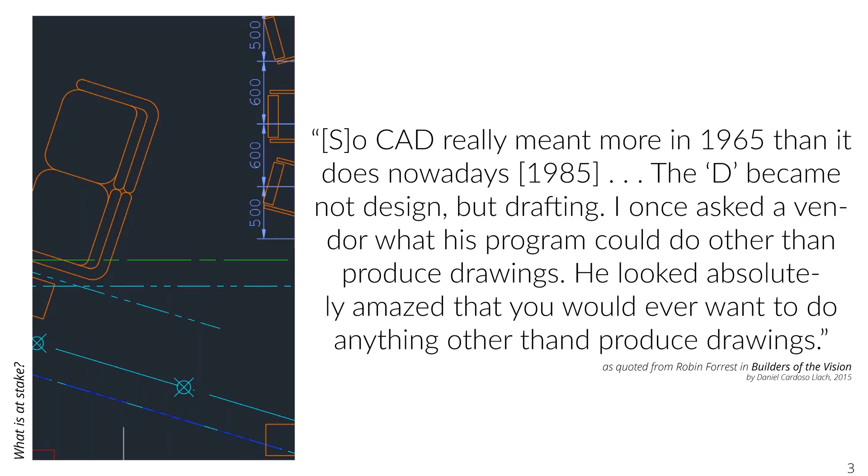often go unnoticed. Within the scope of this research, I point to two implementation inherent drawbacks of contemporary computer-aided design and manufacturing tools discussed in computer science, human-computer interaction, and computational design literature. The first one of these is the linear processing of information.

Primarily, CAM tools heavily rely on pre-programming of toolpaths, which intrinsically inhibits users from exploring the design space. This, in turn, results in inflexibility to reflect and iterate on ideas quickly within the fabrication process, and increasingly excludes the human agent from the process altogether.

Since the contemporary software packages are geared towards optimization and automation, the second limitation surfaces in the form of generic solutions offered by these tools. These algorithms often fail to capture nuances in materials and techniques and are overlooked by non-expert users that lack the means to navigate these complex computational systems.

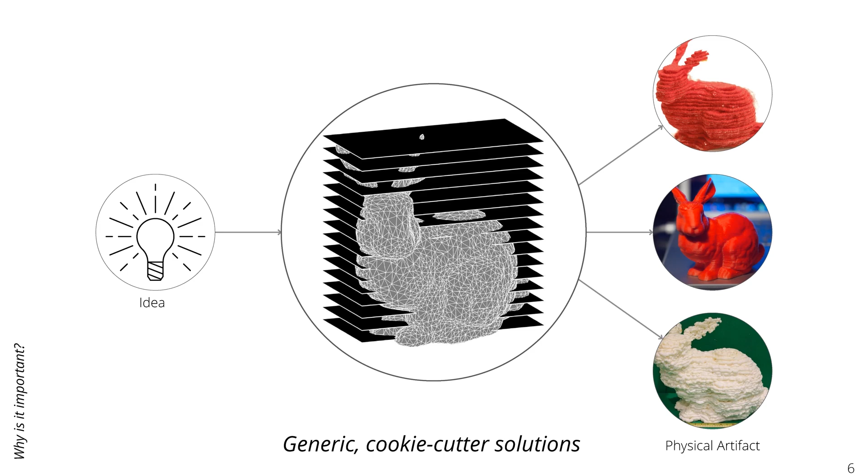Lately, there has been growing interest in probing computer-aided tools to facilitate adaptive and interactive fabrication scenarios in fields like computational design, architecture, robotics, and human-computer interaction. Especially in the HCI community, one of the main areas of interest has been exploring alternative interaction interfaces ranging from augmented reality to capacitive touchscreens for digital fabrication purposes.

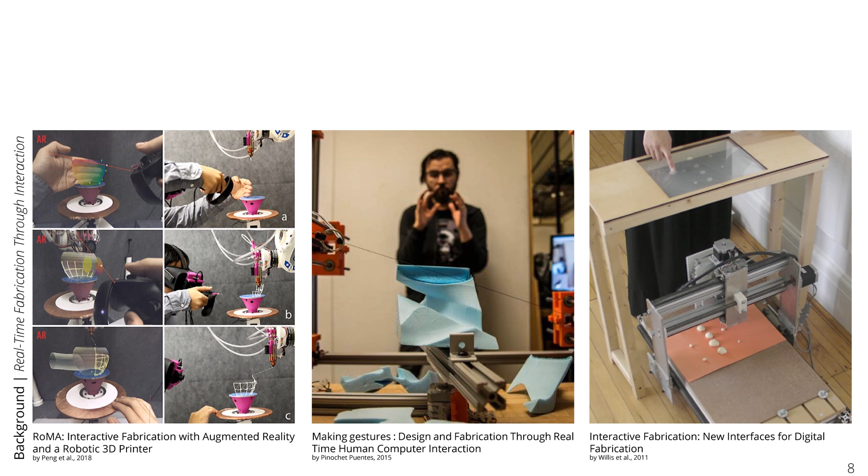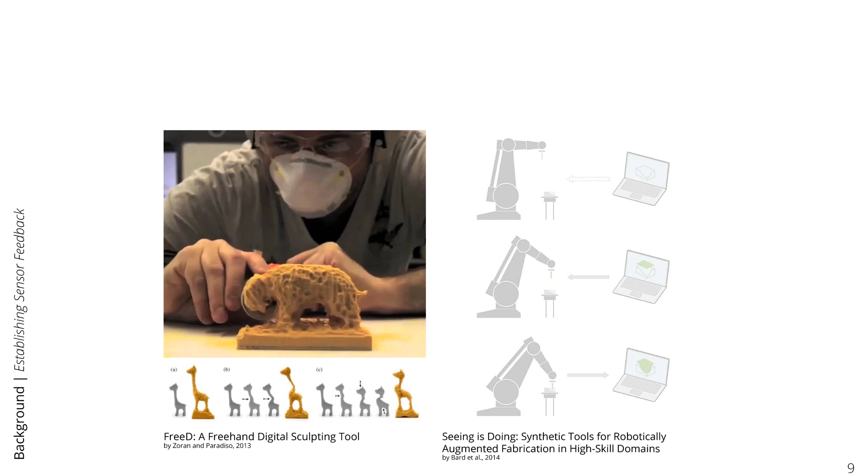In another approach, researchers have been looking into how establishing a sensor feedback loop between digital representation and physical artifact can enrich the fabrication process. Building upon the existing body of work, this research proposes an alternative interactive design fabrication workflow. Throughout this process, human and machine agents take on different roles with varying levels of contribution to the process.

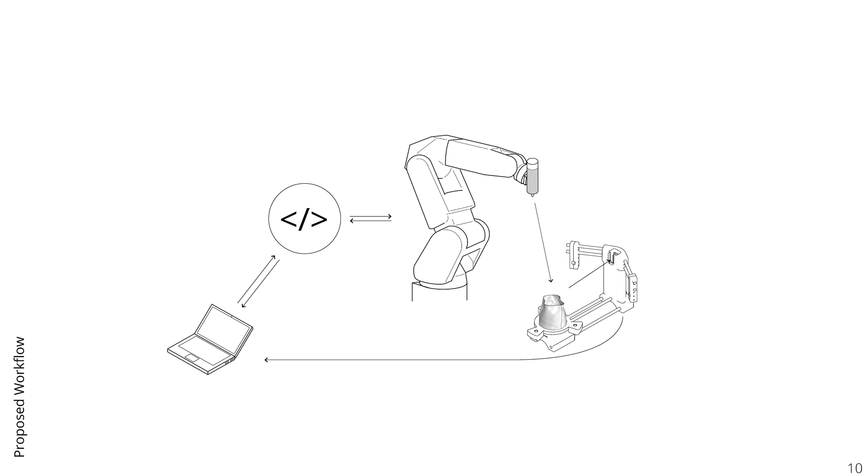By investigating this turn-taking approach, this research aims to explore computer-aided systems not as sole algorithm executors, but instead as flexible facilitators of digital fabrication, capable of incorporating changes and adapting accordingly. This proposed workflow is mainly composed of a mechanical paste extruder, a laser stripe triangulation scanner, a real-time communication protocol, and Grasshopper and Python-based scripts.

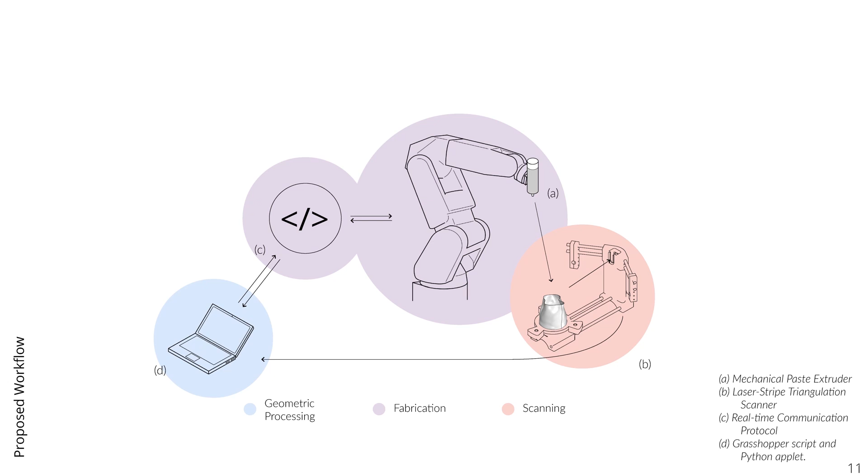Before I share more in-depth information about the technical implementation, I would like to walk you through the workflow. The proposed design fabrication workflow starts with the initial geometric processing stage, where a slicing algorithm generates a series of toolpaths from the input geometry.

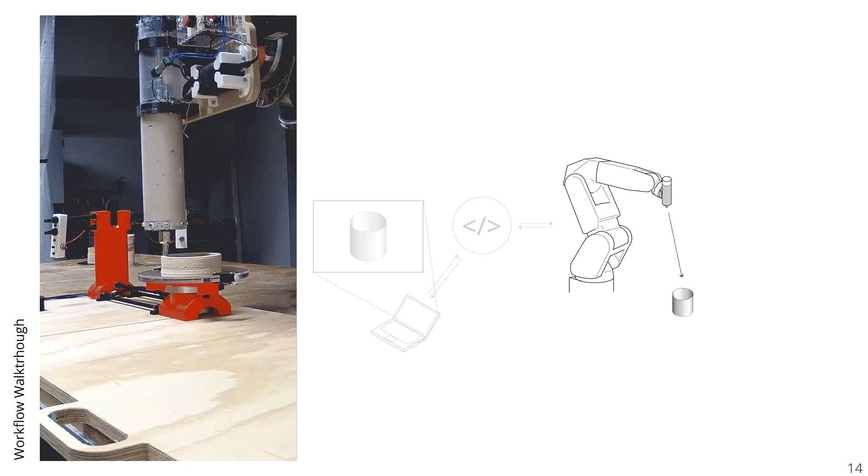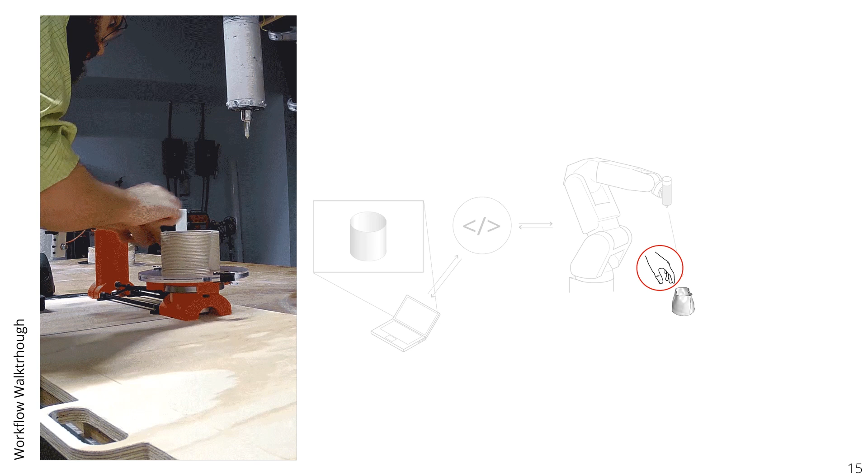Target planes generated by the slicer are then sent to the robotic arm layer by layer using a real-time communication protocol. The fabrication process is carried out until all layers are fabricated, or the user pauses anytime after a sufficient amount of material is deposited for the user to modify. Once the fabrication stage ends, the industrial robotic arm moves away from the fabrication environment for the user to safely manipulate the artifact by hand.

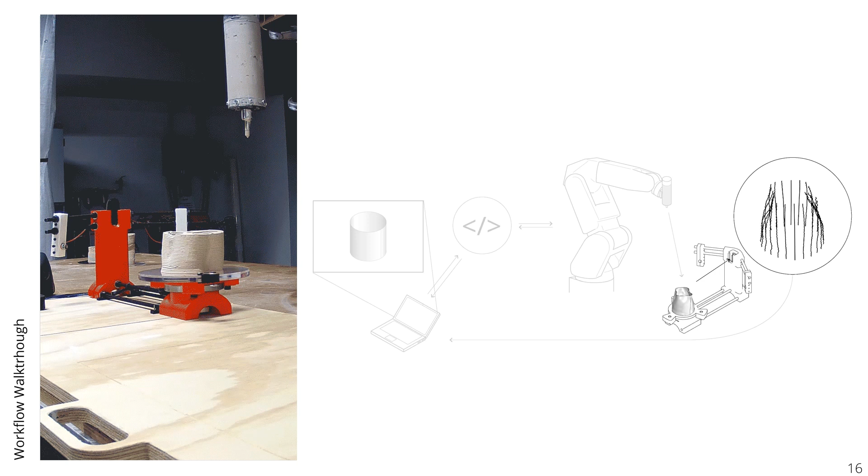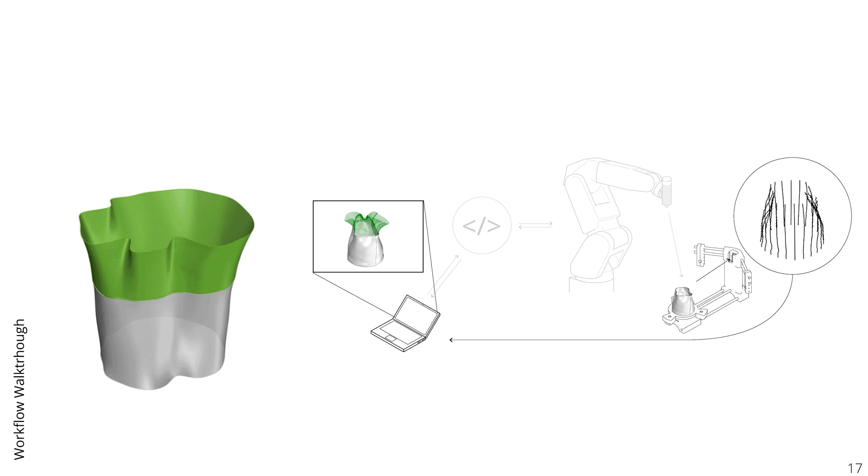Once satisfied with the geometric deformation, the user can initiate scanning of the artifact and subsequent digital reconstruction. Following the digital reconstruction, the geometric extrapolation algorithm generates a design hypothesis using the surface tangency of the reconstructed surface. Using the keypad inputs, the user can tune how compliant the extrapolation is with the surface continuity of the digital reconstruction and generates extrapolated toolpaths.

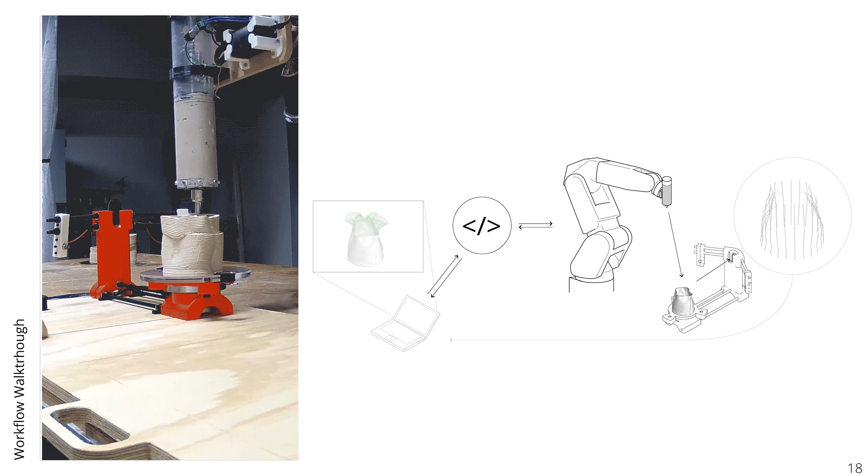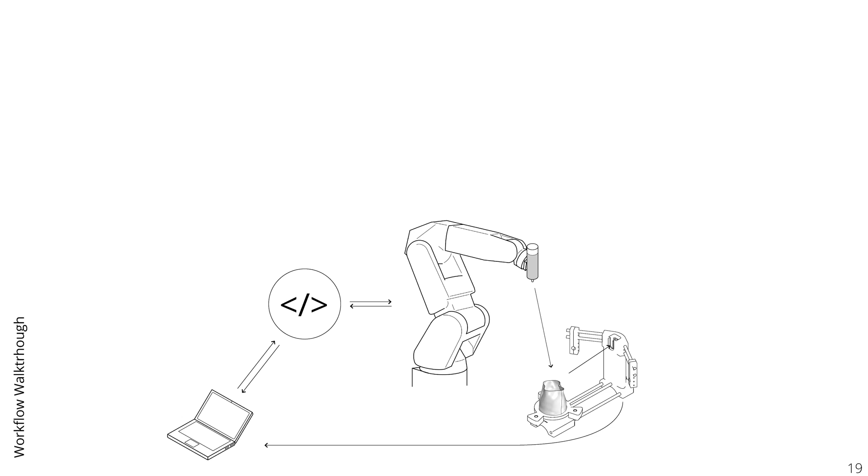Once the user confirms the geometry, the workflow transitions back into a fabrication stage and another cycle of fabrication is initiated. The exemplified cycle can be repeated indefinitely as long as the artifact is within the bounds of the scanner and the artifact is structurally stable.

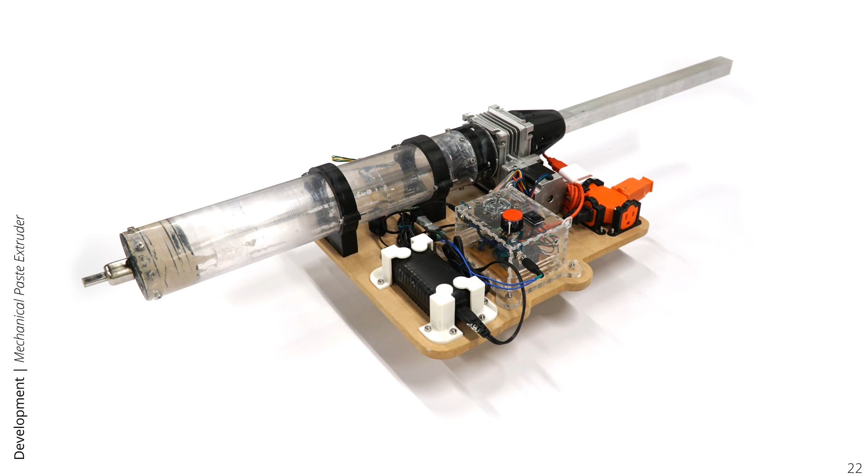This proposed design fabrication workflow heavily relies on the subsystems to work synchronously, and the hardware and software implementations have been significant in pinpointing the limitations and potentials. One of these subsystems is the mechanical paste extruder. Based on an open source hardware project, this paste extruder was modified to accommodate fabrication with an industrial robotic arm. Additionally, a custom circuitry was implemented to allow increased control over material extrusion and to interface with other subsystems.

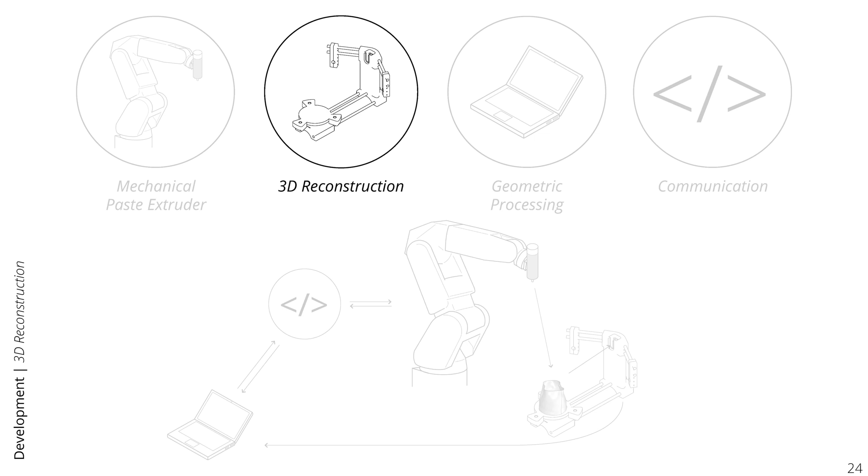The other subsystem that required hardware development was the laser stripe triangulation scanner. Aside from building and tuning the Ciclop 3D scanner kit, significant modifications were made to appropriate the hardware to the proposed workflow. For example, laser light sources were custom fitted with 3D printed mounts to intentionally occlude the light to only shine on the side that is closer to the camera by lowering the light source.

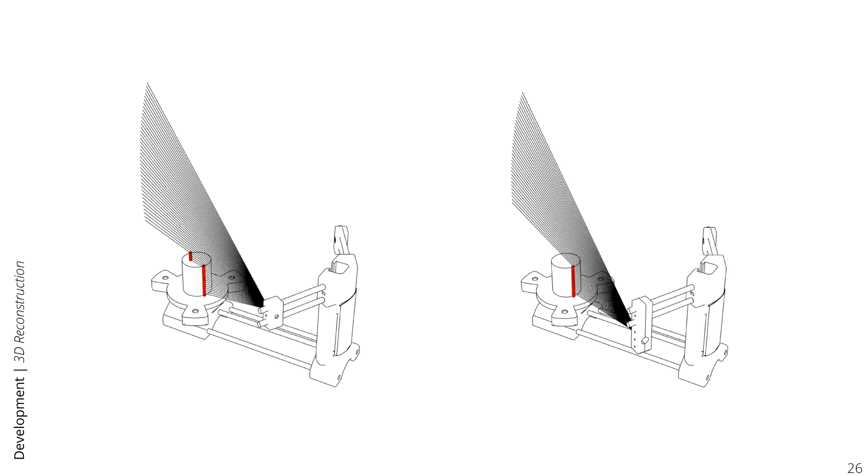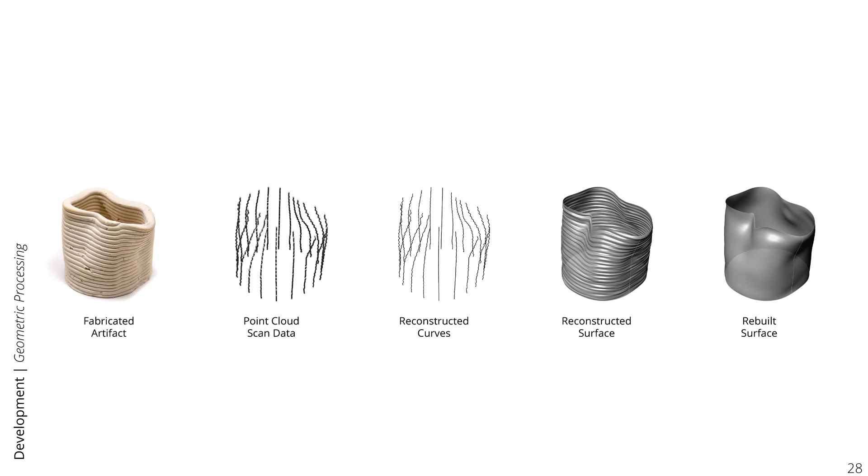In addition to these hardware implementations, a custom geometric processing algorithm was implemented in Grasshopper for Rhinoceros environment. This algorithm utilizes point cloud data captured by the laser stripe triangulation scanner, first to reconstruct profile curves, and then to reconstruct and rebuild the fabricated artifact. Once the surface is rebuilt, the geometry is extrapolated following curvature tangency rules.

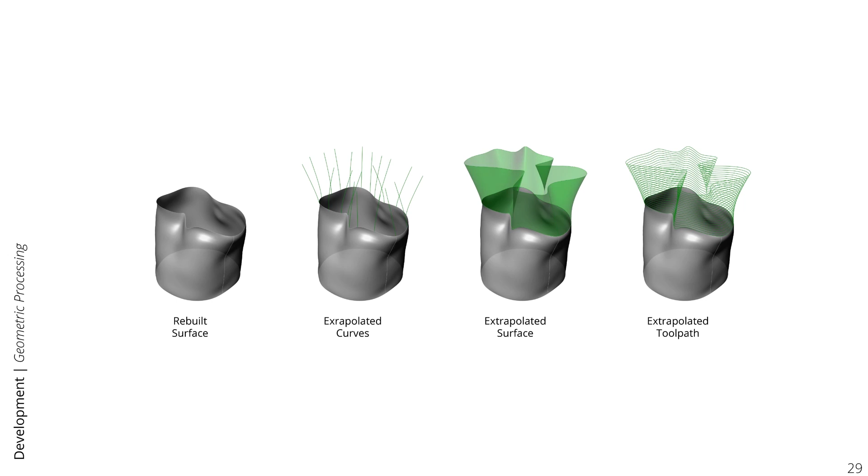Finally, the extrapolated geometry is sliced using a custom slicer, which makes it possible to have non-planar layers that adapt to the already fabricated artifact. During this geometric extrapolation, a parameter was implemented to allow users to explore curvature compliancy of the geometry and have greater control over how the algorithm is executed.

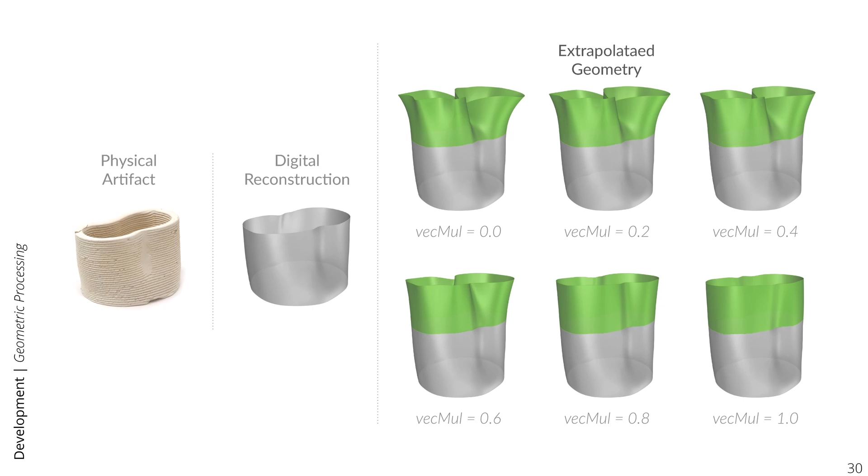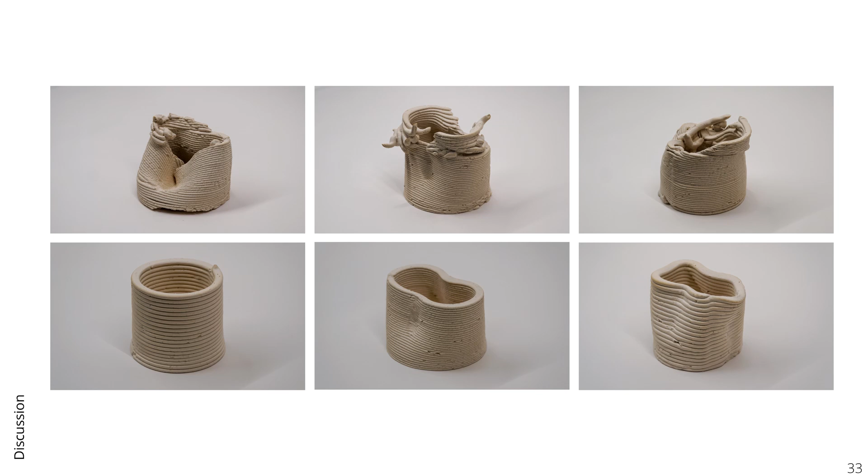As the last part of the development, a Python application was implemented to control and coordinate the data flow between different subsystems. In addition to the custom geometric processing algorithm, the Horus library was used to communicate with the laser stripe triangulation scanner, and the Robot Ex Machina library was used to establish real-time communication with the industrial robotic arm. Although the setup is still primitive in implementation, the proposed design fabrication workflow provides an open-ended framework for creative inquiries.

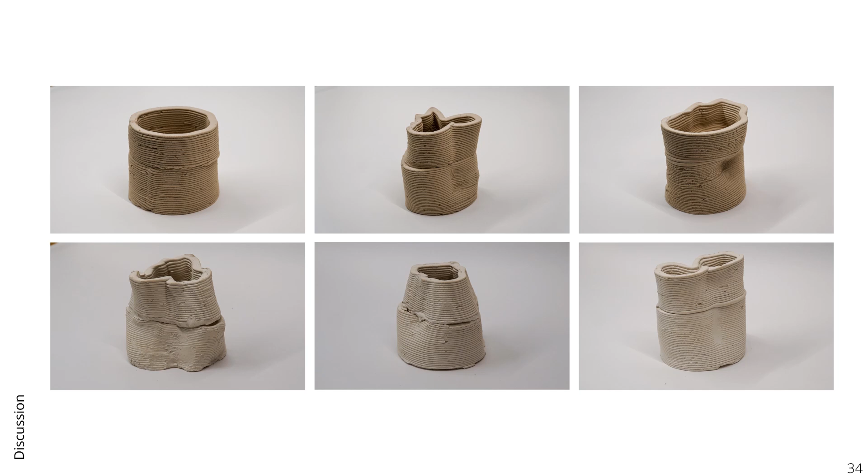Here we see the results of the initial tests, primarily focused on testing reliable fabrication of the artifact. Even though experiments conducted in this stage of development failed due to implementation inherent problems, the experimental setup could successfully capture different topologies and perform geometric computation using the scan data. Once the implementation problems were solved, the proposed system was able to continue the fabrication of the artifact using updated geometry as a base to build upon.

Here we can see how different geometric manipulations were processed between different cycles of the fabrication process. Although some discrepancies between the digital model and physical artifact are present, the proposed workflow was successful at capturing geometric intentions and using this information to extrapolate the geometry.

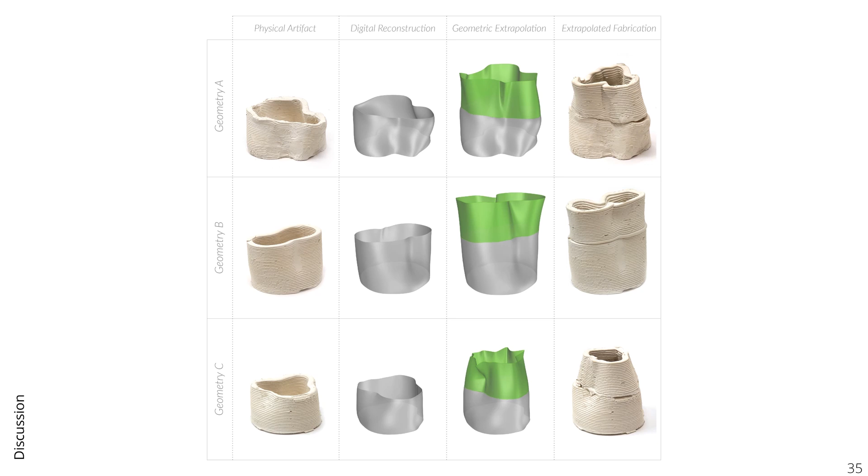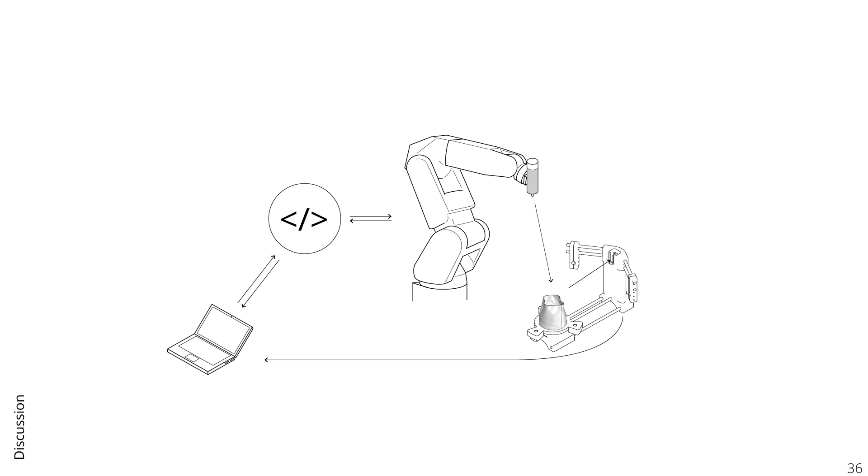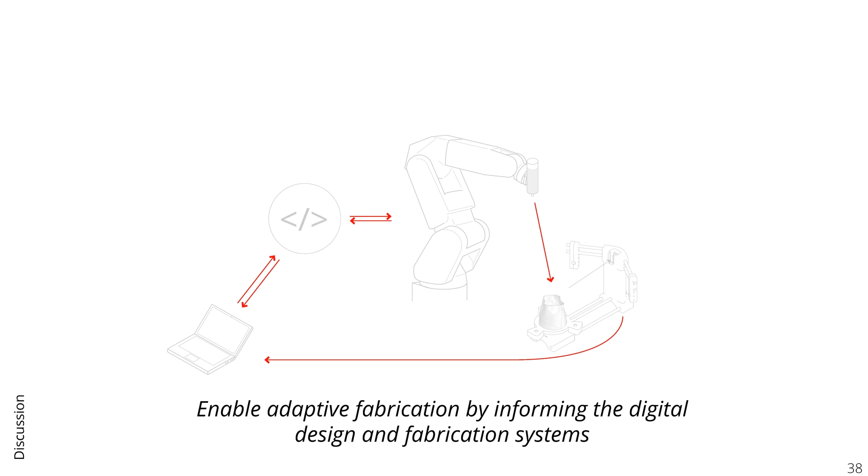Overall, the proposed design fabrication workflow presents an alternative approach to how design fabrication workflows can be extended beyond the point-and-click interactions we are all accustomed to. The workflow achieves this by facilitating hands-on creative exploration and enabling design dialogue over matter. By enabling adaptive fabrication, by informing digital design and fabrication systems, and by probing computer-aided systems beyond representational operations as creative companions.

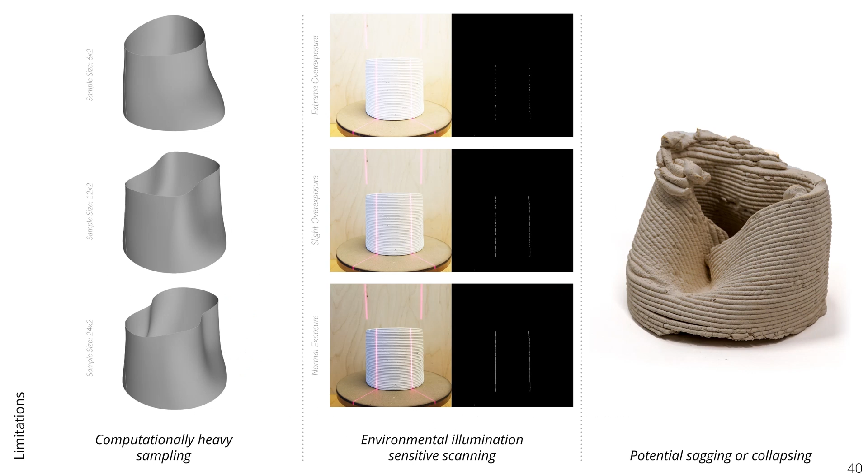Although early results with the proposed workflow are promising, some limitations shown here play an important role in the performance of the experimental setup. For example, while denser sampling of the artifact results in finer details during reconstruction, it quickly becomes a computationally expensive task. Additionally, the laser stripe scanner is prone to environmental lighting changes, and in many cases, a small amount of change in illumination can result in significant errors. Lastly, as much as the proposed workflow utilizes the malleability of clay, it can cause significant sagging in taller artifacts.